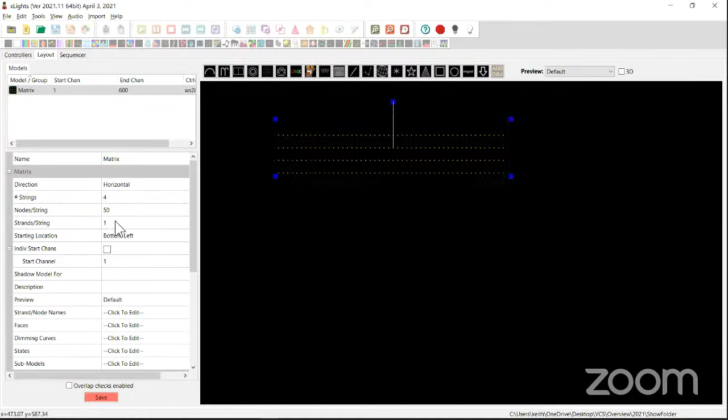Not impossible to build, just harder to build and harder to use in your show. xLights allows you to go up and down or horizontally across, but it kind of assumes the strings of lights you use are always the same length. So this is 16 strings of 50 - it's very easy to model this as 4 strings with 4 strands per string and 200 nodes.

If we look at the node layout here, you'll see this is 4 strings of pixels. So this is string 1 down here, zigzagging across horizontally, then string 2 starts and zigzags across horizontally, then string 3 starts and zigzags across horizontally.

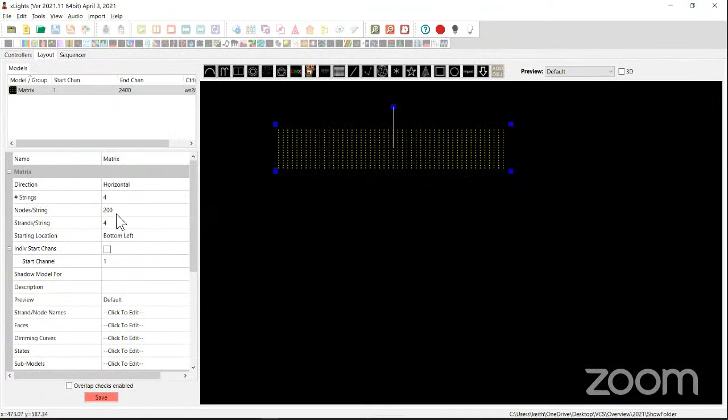But you'll notice that in xLights, there's no easy way to have different numbers of nodes per string. So if you had 4 strings of 200 and then 1 of 150, there's no easy way to model that using the matrix model in xLights. That doesn't mean you can't do it, but it means you won't be able to use the built-in matrix model - you're going to have to use a custom model to create that sort of model.

So generally speaking, I would recommend you try to model it in xLights first, because if you can build your model the way it's supported in xLights, you'll find there are advantages - slight performance advantages in using the inbuilt models, and some advantages in terms of buffers that are supported slightly differently across models, which changes how you can sequence them. Using the built-in models is generally a better thing to do.

Let's quickly run through the models themselves so you get a feeling for them. The arch model is obviously for creating what are typically arches created out of nodes or strips.

There are a set of options here, and we'll go through some of these shortly, but all the models have a set of options that support a set of variations. For instance, there are options that allow you to layer the arches, so you can create multiple layers. So 2 layers of 50, and you get a 2-layer arch and so forth.

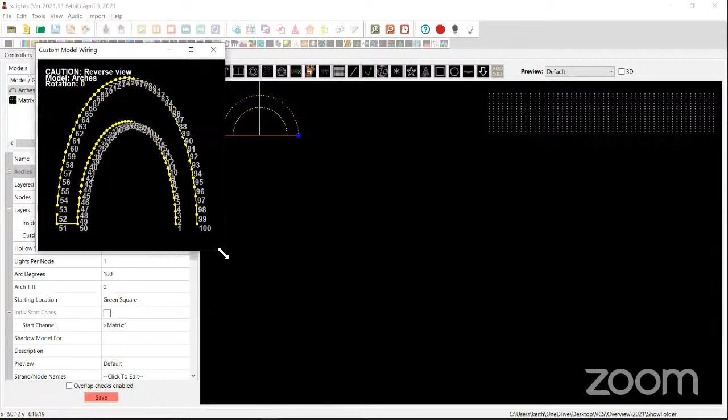There is also a wiring view here, which you might find easier to use, where you can see it. By default this is in the reverse view - learn how to use right-click, there's lots of right-click menus here. But we can look at this from the front, and you can see the wiring starting in the center, then going to the outside and coming back.

So you definitely want to take advantage of the wiring view. There's a wiring view here as well if you select this model, and it gets a little hard to see when there are thousands of nodes here. If we go to the front view, you can see it's starting at node 1 down here - very hard to see, need a bigger screen.

So there's your arches model, there's your candy canes model. Your candy cane model is also useful for modeling sticks. If you've got just sticks of pixels going up, you can click the checkbox here and you'll get sticks, and you can have as many as you want. There's 3 there, we could make it 10 - lots and lots of sticks.

The channel block model is not commonly used, but if you're coming from Light-O-Rama and used to sequencing just at the channel level and you'd like a similar way to represent things, xLights is more than capable of sequencing old AC type lights. So if you don't care to have the model look on screen like your wireframe, and just want access to the raw channels to sequence, throwing down a channel block model can be a great way to allocate, by default, 16 channels.

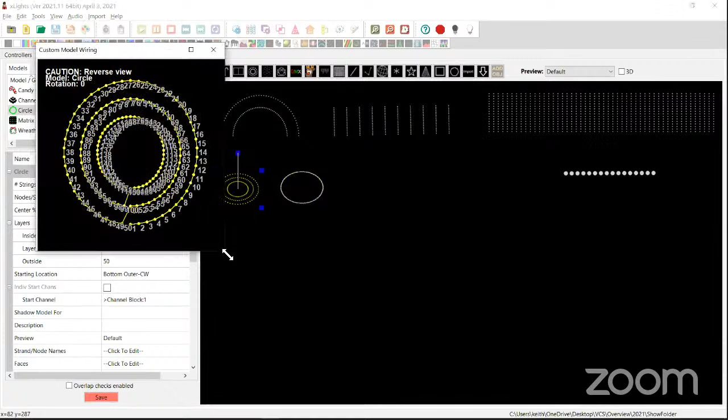Again, take a close look at the wiring view, because although in this case the options around wiring are a lot more flexible - you can start it in the middle or the outside, you can go clockwise or anti-clockwise. Both are possible using these various starting locations. The cube model.

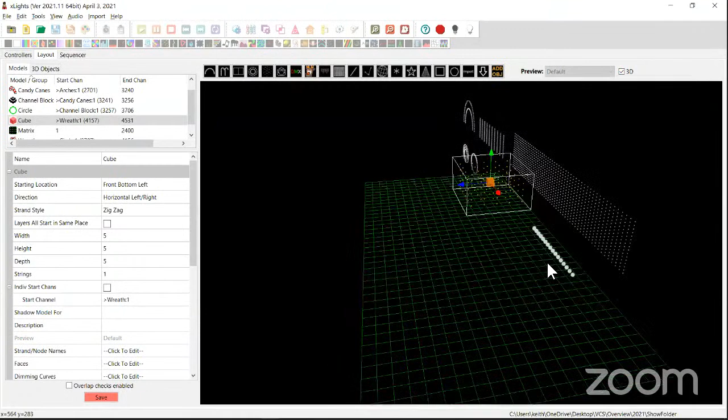Pixel cubes don't look great here in 2D. If we go into 3D mode, the cube model starts to actually look like a cube. But we'll stay in 2D mode.

The cube model can be really useful, not just for people building pixel cubes, which are relatively uncommon since they consume a lot of pixels quickly. It can also be useful if you've got a yard full of pixel stakes laid out in a regular grid. The cube model can represent that and give you access to additional render buffers that allow you to do really cool things, which is harder to do if you model those sticks as a candy cane model, or using the polyline model, which I'll show as well.

The custom model is the catch-all, and we'll come back to it when we go to the download. The DMX model is used for a whole bunch of different things.

There's a general one which allows you to model pretty much any DMX device. It doesn't give you a great representation on screen, other than a set of bars showing you the values the channels are getting.

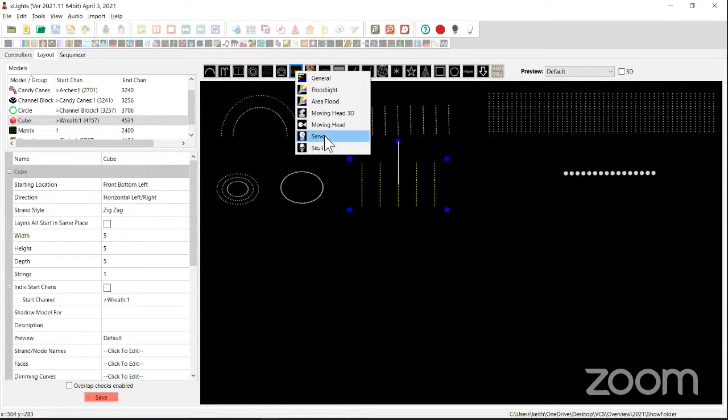But then there are more specific types like floodlights and moving heads, servos, and skulls. The servo model is extremely powerful for representing all sorts of moving devices you might create, and the skull model is designed for those 3D plastic skulls with multiple servos, etc.

The moving head and moving head 3D models, if you have those sorts of devices, take a lot of configuration. You've got to set all the channels, etc. But this allows you to control those sorts of things.

Definitely not as powerful as dedicated show layout software that's all about setting up a stage, etc. It's not at that level, but if you're building a Christmas show and you just have a couple of moving heads in it, this is more than adequate for sequencing those sorts of things.

And if you have something as simple as a fog machine, you can use the general model, which here just draws as a box. You can configure the number of channels and colors and things like that. This is great for fog machines, bubble machines, and that sort of stuff.

The image model isn't that exciting until you're actually associated with an image, but this can be really useful, particularly if you're coming from an AC show and you just like to represent each prop as a picture of the prop, or a picture of something representing the prop.

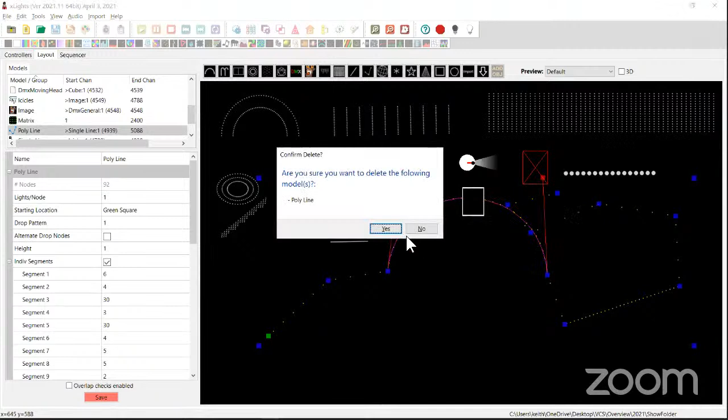The other thing you can do with the polyline is use it as icicles, by changing the drop pattern here. So if I create a 3-4 drop pattern, you get alternating nodes of 3 and 4. If I have 1 pixel between each, you can still put that in. So if you've got an icicle layout that looks like this, you can do it that way and define as many as you need to.

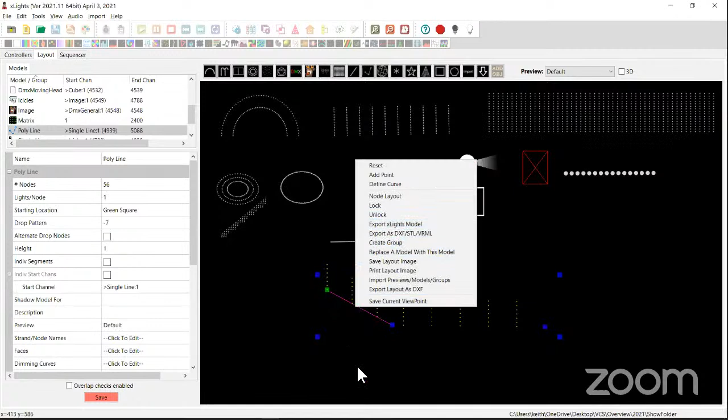Now if you want to do pixel stakes going around your garden, you can also do this by defining a -7, and it turns the drop downs into go up instead. Combined with your curve, you can actually do pixel stakes that follow a curved driveway or something like that quite easily with the polyline model. It's quite flexible from that perspective.

I'm going to skip over the globe model. Like the cube model, it's a 3D model if you're building a globe. The spinner model allows you to define a spinner. You can go and define the number of arms, etc. The spinner model, much like the icicle model, and even I'm pretty sure the polyline model, does offer you the ability to do alternate node numbering.

We'll go up and do it on the candy canes. So there is this checkbox here called alternate nodes. If you look at this wiring view - well, let's do the node layout instead, it's a little bit easier to read. You can see that by default for these particular stakes, it's starting node 1 at the bottom, and it goes up 1, 2, 3, 4, all the way up to 18. And then it comes down again and starts at the next one down here.

The problem with this is it's actually challenging to wire, because you're going to run the pixels up - that's easy - but then when you get to the top, you've somehow got to run an extension wire all the way back down to the bottom of the next stake and do the next stake up, which is not a particularly friendly way to have to model these things.

But if you use this alternate option, and things like the spinner, and I think the polyline as well, support this, and you go in and do the node layout, you'll find that the node layouts become quite jumbled. So now we've got node 1 here, just like before, but node 2 is now the third node up, and then it jumps again to node 3 and so on up, and then it comes back down again. So the last node on the stake is now the second bottom node, which makes it a lot easier to jump from here to the next stake without having to add large extensions. And so if you buy a set of pixels with an appropriate gap, etc., this just makes life a lot easier.

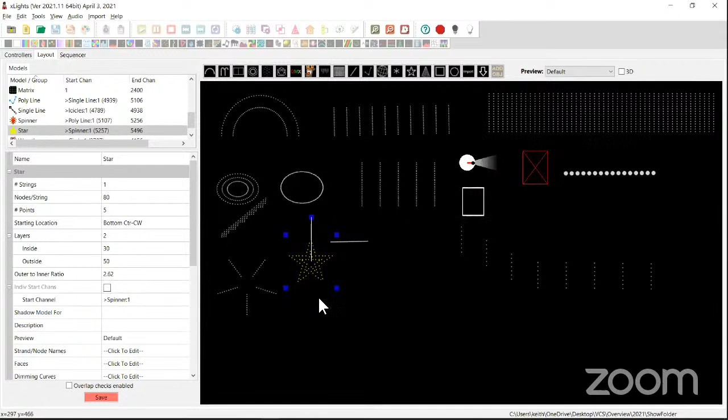Using the star model again gives you access to different buffers for sequencing on, which are going to make things more flexible when you get to sequencing. So again, I suggest you go that way if you can. The tree model - a very, very popular prop.

The tree model, by default, is this 360-degree tree, but there's a whole bunch of different types. You can have flat trees, or if you're building a ribbon tree, which is quite popular, that's a slightly different representation at the top, recognizing that all the strings are exactly the same length.

But even in the round, a lot of people don't really need a full 360-degree tree. Depending on the layout of your property, people may not be able to see the back of the tree, or maybe they can't see the full tree. Most of my trees are 270-degree trees.

So the back of the tree, which you can see in 3D here, is open, because no one can really see that when they see my display. They can see a little bit on the sides, so I wanted to fill that in, but there was no point putting a bunch of pixels at the back. These days, with everyone using bullet strips that you punch the pixels into, they largely make the back of the tree invisible anyway. So there's not a lot of point filling in the back, and you can cut it down by reducing the degrees.

A lot of people also build their trees up against a wall, so you might want a 180-degree tree instead, allowing the tree to basically sit back against a wall or something.

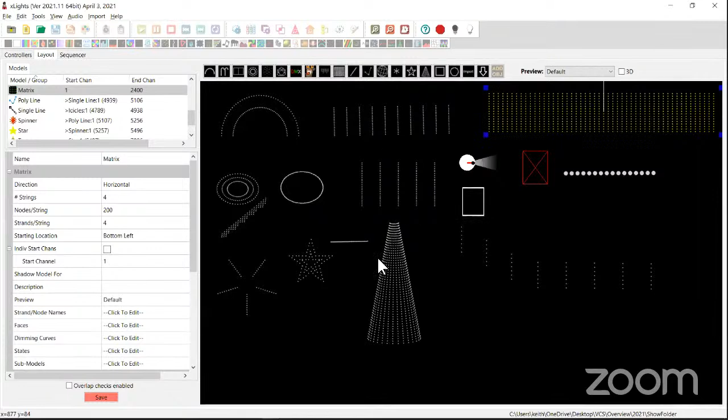If I take this model and export it as a custom model - hang on, we're clicking on the wrong model. If I export this as a custom model, we'll export it as a tree, and then import that model back in. There it is.

You can see it does not look the same, and it never will. It's always going to be that you lose some quality, and you're potentially going to lose some nodes.

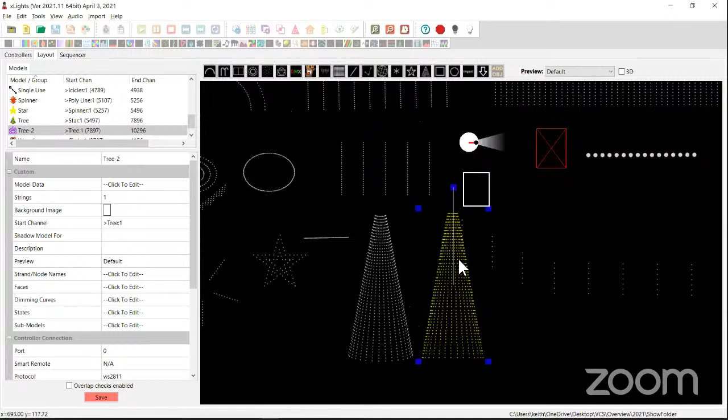If I run check sequence, that's a tool that scans your entire configuration. It's not just for when you're sequencing, it'll also check your layout. What it does is a deep scan of your layout to check if there are any problems.

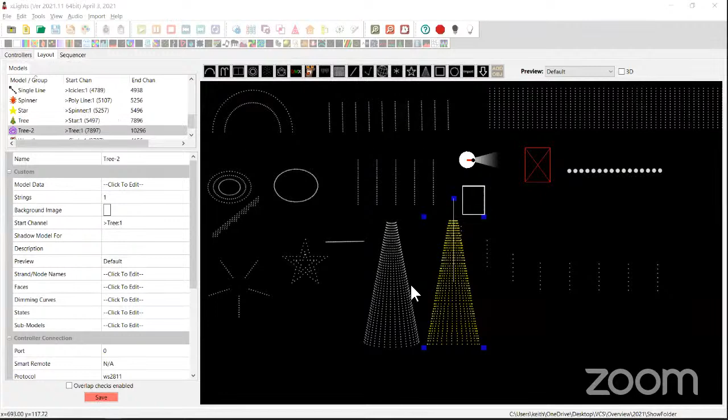So here's the results, right? You can see that the tree model we just imported has got a whole bunch of issues - a whole bunch of nodes are missing from the tree. That's just because when this tree gets exported, a lot of these nodes are really almost on top of each other, and the export process has lost some of those nodes.

So now I would need to go back in and manually correct and fix them, and that's before I then work out how exactly I'm going to do all the numbering to represent the wiring I've done. So this is the hard way. The easy way is to build the tree the way xLights expects it to be built, and use equal length strings.

The window frame model is great for outlining windows. It's also useful for outlining doors. You do have control here, and you can set 0 to the number of pixels, and now you've got a door outline. You may have a window that is hard up against the top of the house, and therefore you don't want the top. You can model that relatively easily using the window frame model.

You could also do this using a polyline or a string model. It's much the same. We did show you the import when we imported that tree. But if you're out there purchasing models from the suppliers, there are a couple of vendors, including the sponsor of this room, who sell models and provide a download.

Sorry, I'm in Australia. It takes a little bit longer to download. And so this has basically, there's multiple suppliers in here.

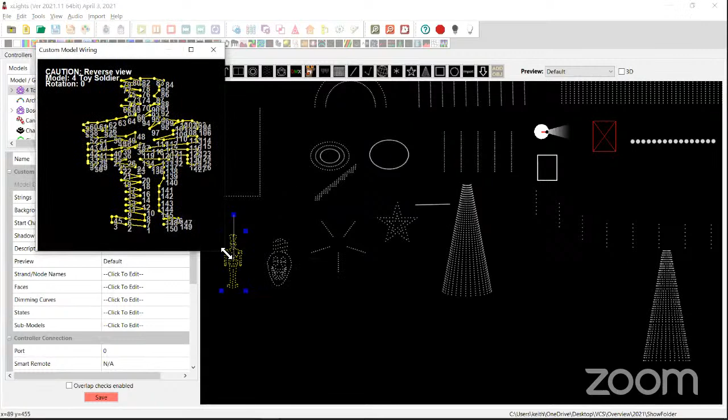You can see the wiring model of these things just by right-clicking and bringing up the wiring view. Now, this is deliberately the reverse. The reason we show these models from the reverse is the wiring view was originally built to help allow people to punch pixels into the props and know where they're going. And the reason we do the reverse is because most of these props are typically Coro props.

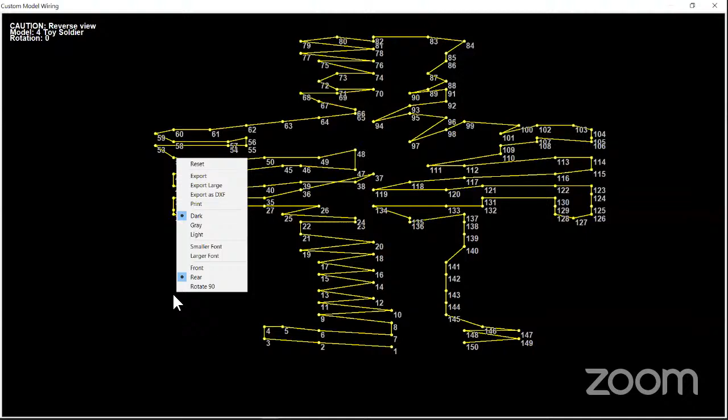People punch the pixels in from the back. And so having a representation of the model from the back is a lot easier when you're punching pixels in. If you were looking at it from the front, but you had the model from the back and you're punching pixels, you'd actually be punching them in reverse, and then you end up with issues at the end. So that's why we show it from the reverse.

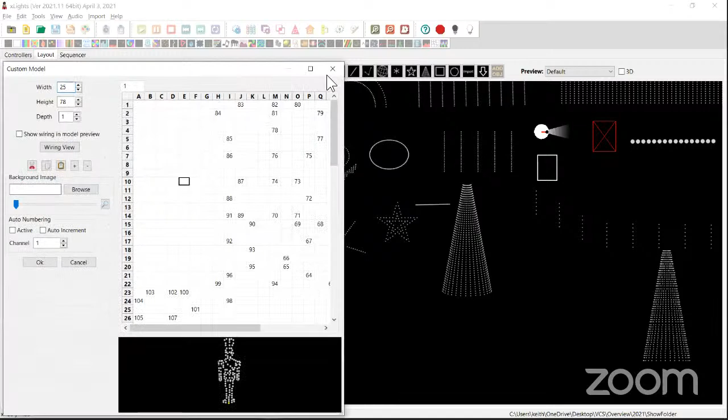Now, it's actually relatively easy - if you go into the model data, let's say you did push the pixels in reverse, if you want to flip the model around, it's actually relatively easy to do. If you right-click up on the grid here, there's a whole bunch of tools for manipulating these pixels and creating gaps and things like that. One of the things you can do is just horizontally flip the model. So if you've accidentally pushed the pixels in reverse, come in here, horizontally flip the model, and then the model will be fine - it'll be your correct representation.

You can also do weird and wonderful things in here. Let's imagine between 97 and 98 I've put an extra pixel in, so I need to create another 98, and then I want this to be 99 and 100, incrementing the models from there. You can right-click and say insert prior, which inserts one node prior to that node. That node's now 99, every other node has increased in number, and now I can insert a 98, and my model is correct again, with no gaps.

I can also delete a node. So I can delete 98 here, and now I've got a gap. I can right-click and click on compress, and it will close that gap. It realized there was no 98, so it took 99 and decremented it by 1, and decremented everything after that, and it ends on 150 again. So there are lots of little tools in here to try and make editing custom models a little bit easier to do.

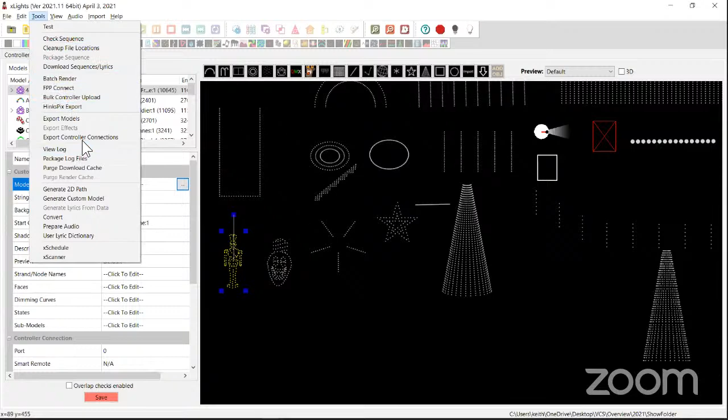There's also a custom model builder, a tool up here called Generate Custom Model. This process helps you build a custom model from either a photograph, or it will allow you to create a video which plays a pattern or runs a capture pattern onto your prop, and then you can load that video back into xLights. xLights will watch the video and basically place all of the pixels onto the model for you. I'm not going to run through that right now, but there are a number of people who have made videos on using that tool to create their model that way.

Now, the other thing you get when you download a model from a supplier like Boscoyo is some of the underlying definitions as well. So with something like a singing prop, you need to define the face definition to say which pixels should light up when various phonemes are being sung in the sequence. That's done in the face definition, accessed down here. Here you can see James has defined the pixels that are going to light up. When the A sound, which is typically the largest mouth shape, you can see these are the pixels that light up, versus the U, which is the smallest mouth shape. You can see which pixels are lighting up here as well.

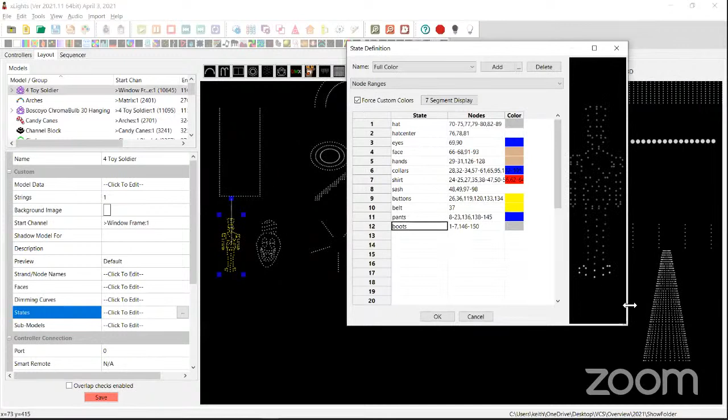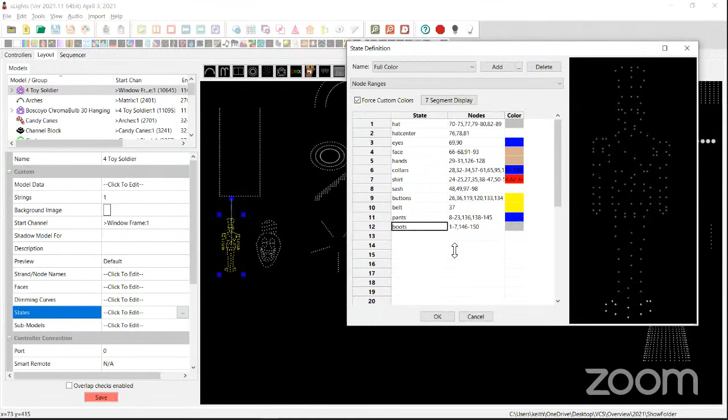And that's done with the states, and he's included the states in the model as well. So you can see on the right-hand side here, the boots, the pants, and so forth. He's even defined the color those various elements should be, so when we come to sequence this model, we don't have to separately work out which color to turn on which pixels. You can just use this state that's been defined on the model and turn all the lights on, and all the pixels will turn on the right color. So again, a very powerful reason why you want to be downloading models from suppliers if you can.

So that's the bulk of those pieces. Let me talk a little bit about some of the other common properties here. Let's talk about it from the tree's perspective, because this often confuses people when it comes to things like strings, nodes per string, and strands per string. I want people to understand what these things do.

By default, this is set as 16 strings, 50 nodes per string, and 1 strand per string. The number of strings should typically represent the number of connections from your prop to your controller. So this is assuming I've got a controller with 16 ports, connecting 1 string each, putting 50 pixels on each port. That's a fairly significant underutilization of a controller.

People do like to do this, typically not with 50, but often with 100, because it's relatively simple to manage from a power perspective. They'll use 16 or even 32 ports off a controller to run a tree that way. But lots of other people like to pack as many pixels onto a port as they can. These days, gone are the days where controllers max out at 170 or 340 pixels per port — now controllers are typically up around 1,000 and more pixels per port. So people often want to run 600 or even 1,000 pixels on each port, zigzagging up and down many times with only 1, 2, or maybe 4 connections to the controller instead of 16.

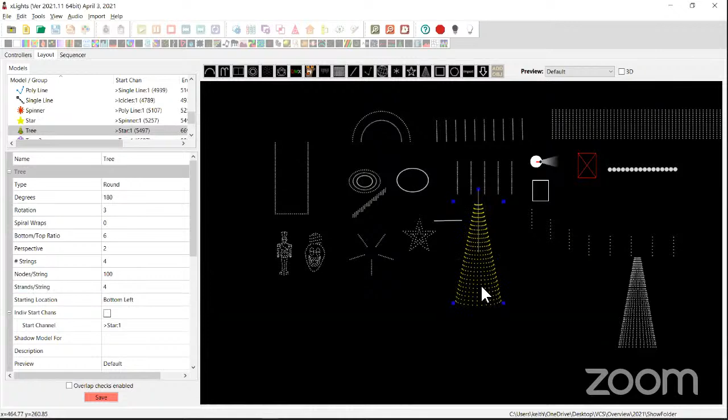The way you'd do that is by reducing the number of strings. So if I wanted to make this 4 strings of 800 or so, I could change the number of strings here to 4. Now it's only showing 4 lines, so what we need to tell it is that we need to zigzag up and down — let's say 4 times. Strands per string represents the number of times each string zigzags up and down the tree. If we change that to 4, the tree's back to looking like it did before.

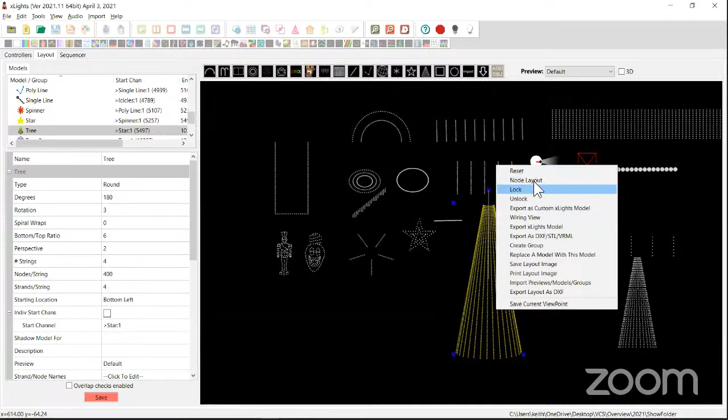Then we'll want to increase the number of nodes — say, 400 nodes. So that's now 4 strings of 400 pixels. That's how you'd represent it. If you look at the node layout again, it's easier to read — you can see it's 4 strings of 100 pixels, going all the way up to 100. It zigzags: the first pixel is here, but the 200th pixel is here, because it goes up 100, then down 100, up 100, then down 100, and then the new string starts.

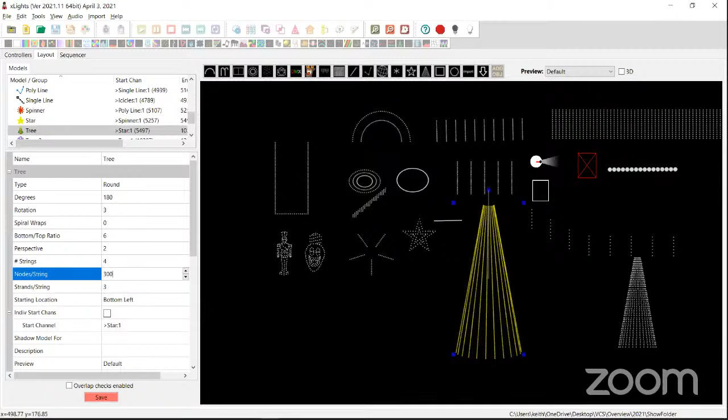Now if I made it an odd number of strands — say 3, with 300 nodes — let's do our node layout again. Node layout's your friend. You can see it ends at 100, but there's only 3 strands per string, so the 300th node is at the top of this 3rd strand. It always assumes you're then going to start the next one at the bottom, because that's typically how people wire things together.

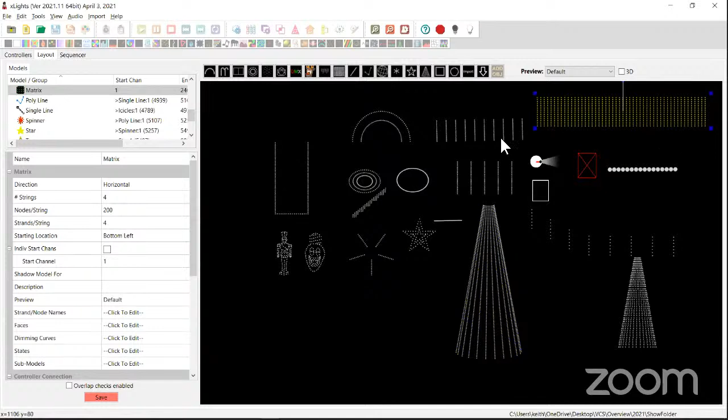The common one we see people do — a lot with chroma mesh and the like — is 48 by 24. What they'll do is run a string of 100 pixels: go across 48, back 48, then 4 more in, then stop, and run another string in from there. This sort of wiring pattern is starting to get into that weird and wonderful territory, and at that point you'd need to turn it into a custom model, because there's no easy way to represent that.

You could just model that as a single string of pixels. So you'd say that was... what's 24 by 48? I'm lazy, the computer's even lazier. There it is — 24 by 48 is 1152. So I could say that was 1 string of 1152 pixels and 24 strands per string.

And that would be a chroma mesh. The challenge is that it's representing it as one string, which isn't a problem from a modeling perspective — it's all fine, it will sequence fine and everything else. But one of the things people like to do these days is push the configuration of their props to their controllers. A major source of frustration for people in September, October, and November is getting their lights to look like they look in xLights. The biggest challenge is lining all your configurations up between xLights, your show player — often FPP — and your controllers themselves.

So that's all good. We will delete this model here. That's obviously a very sick model. We don't want to do that.

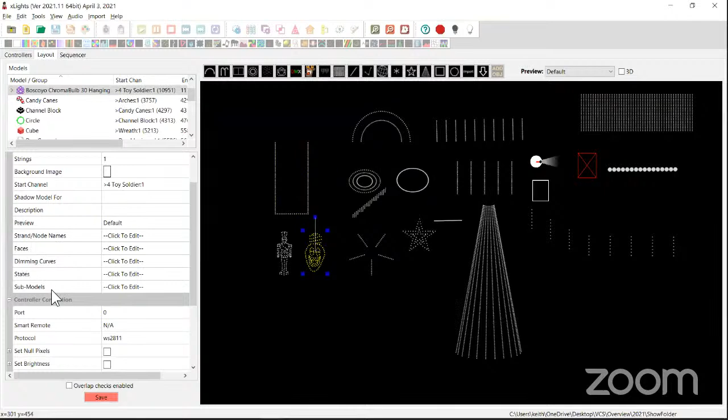Let's quickly talk about submodels because it did come up there. Submodels are a way in which you can take a model and break it up into elements. As you saw, the chroma bulb has submodels associated with it. We looked at the faces, but there's also this submodel section down here. You can have many, many submodels per model. These allow you to define subsets of the pixels on that model as belonging to a particular thing. So here they've separated the left eye and the right eye, and this will allow us to sequence those things independently if we so wish to.

This mouth 5 down here is referring to a node 153, which clearly does not exist. That doesn't get close. 142 looks like the highest. That's why we were getting that warning.

Submodels: the socket and the bulb outline, etc., is a classic example of where a submodel would be very useful. So if you wanted to color the socket in gold or silver and then change the bulb to different colors representing a bulb that's changing colors, having access to those submodels so you can sequence those things independently is an incredibly powerful thing to do in the sequencer.

The other reason submodels are interesting, and there are videos you can go watch on buffer layouts etc., is submodels let you effectively create interesting or useful subbuffers.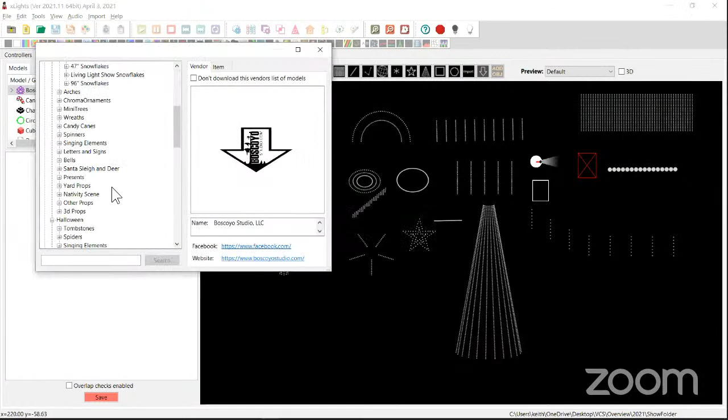So if I go here... chroma ornaments, one of these will do, I think. He's got ones here that have matrices on them. Matrix, there we go. The image doesn't have a matrix, but I'm going to trust the description over the image. You can see here how this chroma thing has got a kind of a matrix, but it's not laid out like a nice regular matrix here. It's a bizarre twisted shape that represents, obviously, a 3D ornament.

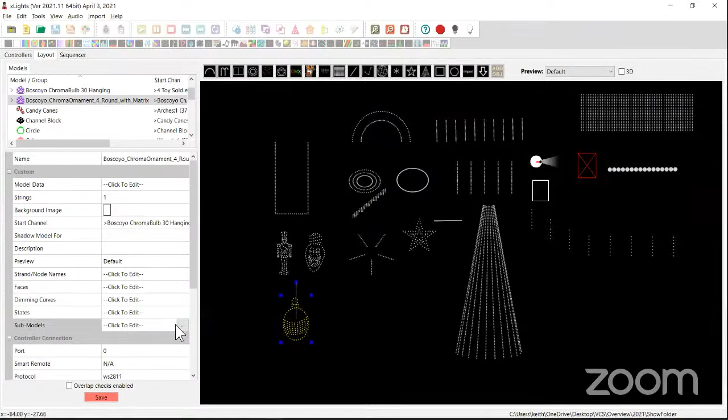That's almost certainly got a matrix submodel associated with it. It's actually got a very poor matrix associated with it. This submodel here would let you light that up, but let's go and add a submodel here. Right, let's add a better matrix.

Now, if we go back to our original matrix, it's 25 to 94. So I'm going to assume... where are we? That's 85. That's 79. That's 30. 94. What has he done? 30. Oh, he's counting this one. That's what he's doing. So he's gone down 19 to 24.

So what we're going to do is a vertical buffer layout. We're going to start over here with 107 and go to 112, and then we add a row. If you add a matrix like this, so this one here is 85, 84, so it's 85 to 79, 85 to 79, and so forth.

I'm not going to spend the time that it will take to do this, but if you actually define the matrix in this way—and I've done it vertically because the pixels were laid out that way—defining the matrix this way will actually let you easily sequence this and put text on it and things like that, which this matrix model won't let you easily do. So you don't want to be defining your models like this. You want to be more careful in terms of how you lay your buffers out here to make these things more practical and useful.

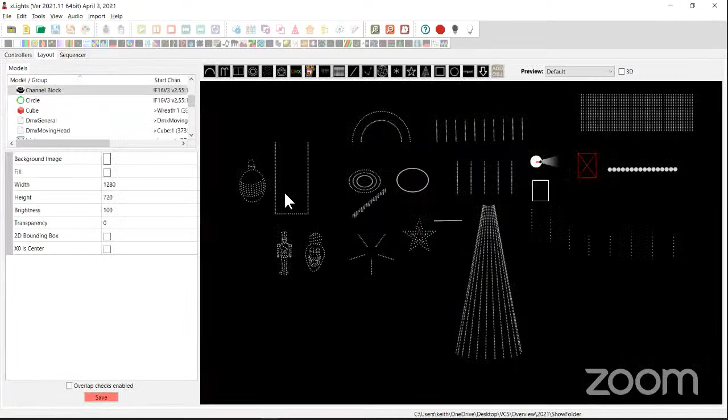Now, I did say that we could do weird and wonderful things with our custom models. One of the things your custom model supports is the ability to define multiple strings. So let's say, rather than doing this all on a single string, because this is 120 nodes, let's imagine I decide I'm going to use 2 strings.

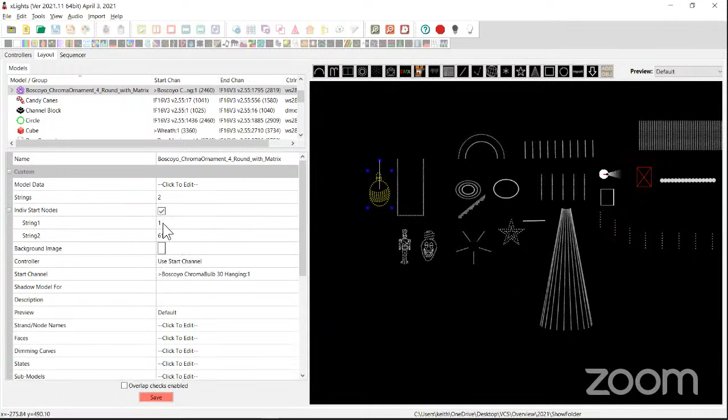By default, it assumes the first string starts on pixel 1, and then the 61st pixel will be the second string. But a more common way to wire it would be to start the second string at 101, so I have a full string of 100, and then a final string of 20 pixels on that prop.

Then if I come back to my visualizer and find my chroma ornament, you can see here how it's 2 strings. And if I drop it onto here, it's put 100 pixels onto my first port and 20 pixels onto my second port. Again, making it easy.

So this is why you may want to use custom models for some models, because it gives you a great deal of flexibility in terms of how you split your strings up, something that's not easy to do with the inbuilt models. They tend to have a fixed construct, as we've been talking about.

Now, there are other ways to work around these sorts of issues. There's a concept called shadow models, which there are videos available on that will walk you through that stuff. If you really want to get into that, it can help you avoid having to go to a custom model. You could create shadow models for your bizarrely wired tree, for instance. It's an alternate way to do things.

Before I go into the sequencer, I don't think there's anything else. There's a bunch of stuff down here that you may want to play with.

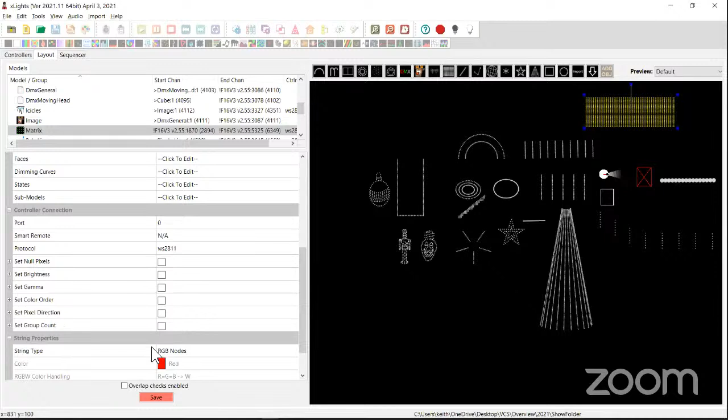Some people, sometimes your nodes aren't RGB nodes. By default, xLights assumes everything's an RGB node, but let's imagine I'm using strip light around this window and they're BRG strips. Well, then you can come down here and set it to BRG strips, and xLights will reorder the colors accordingly.

Beware that you only want to do this in one place. So I've done it here in xLights. Don't come up here and change the color order to BRG as well, because that will effectively reverse it. This applies it on the controller, this down here applies it in xLights. You want to do it in one place, not in 2 places. It doesn't matter which one you choose.

One gets done in xLights and rendered into your FSEQ file, which is then loaded onto your show player and played. This one here gets done by your controller as it reads the data or receives the data over the network. It will shuffle the data order of the pixels before it sends it out to the wire.

One of the reasons why I would generally do color order in xLights, because it doesn't generally change. Once I've built my prop, it's built with BRG pixels. It's not changing. If I go and rebuild my prop, I'm going to do it once per year. It's no big deal to come into xLights and change it.

Brightness, however, is something that I would typically set on the controller. The reason for that is brightness is one of those things you'll want to play with, maybe just during your setup time, when you're trying to sort of perfect everything and get rid of the glitching that occurs. Go and watch my other video on why glitching occurs on pixels.

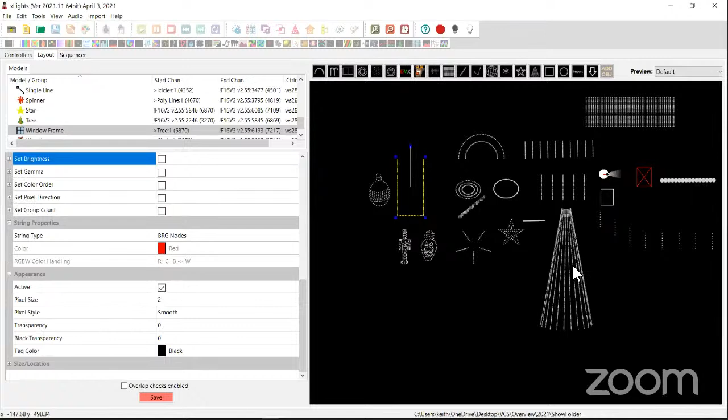Appearance settings, you can hide a model. So if you've got a model that you're planning to build, but you haven't really got around to yet, you just want to make it disappear, you can click this active thing here and it will disappear off the layout. It stays in your list up here, so it's still here. You can still sequence on it and everything else, but it won't appear in your layout at all. So you can do that.

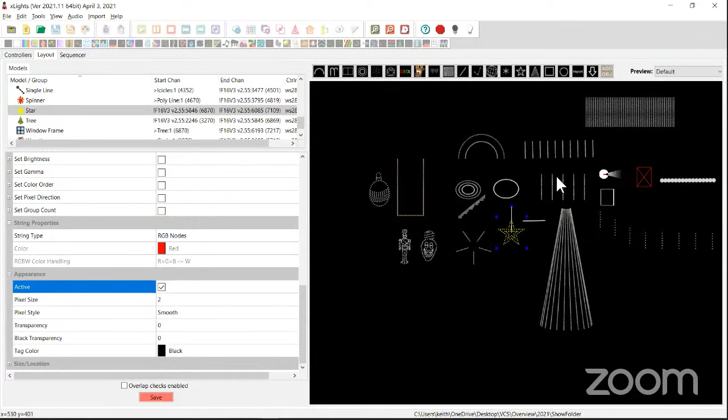The other thing people like to play with sometimes is your pixel size. Sometimes people will decide that this default of 2 is not big enough. They'll want big ass pixels. That's just how it looks on the display. It's obviously got nothing to do with how it displays on the lights, but sometimes you may want to do that. Be very wary of playing with pixel style.

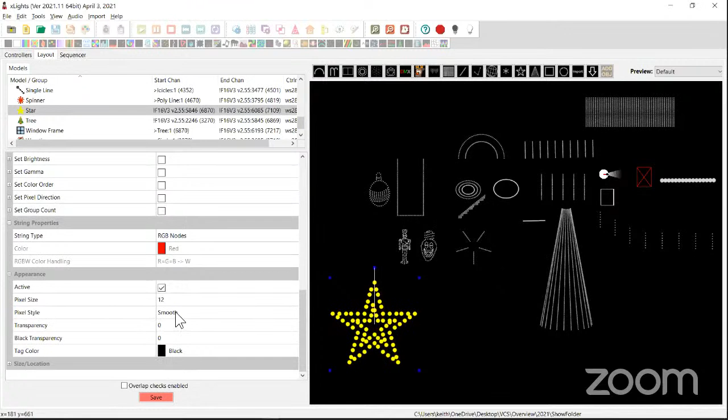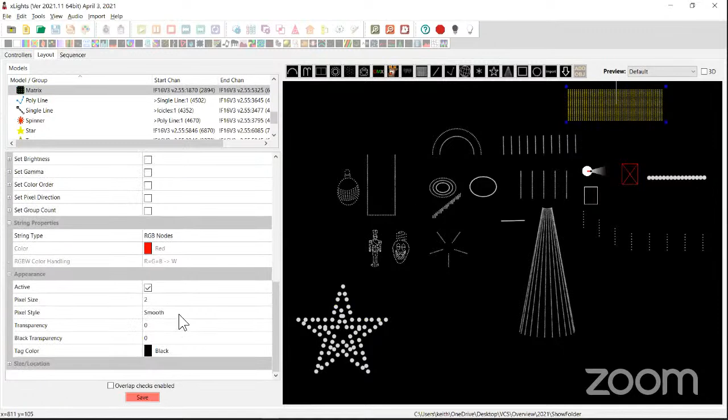Smooth's okay. I think square's okay. You may want to use square if you've got a matrix and you're using it in 3D. Matrices in 3D don't always look spectacular. They can often look like the pixels disappear, and changing them to the square setting can sometimes make your matrices look a lot better in 3D mode. Be careful about using some of the other ones. They can have a significant impact on performance, so you may not want to do that.

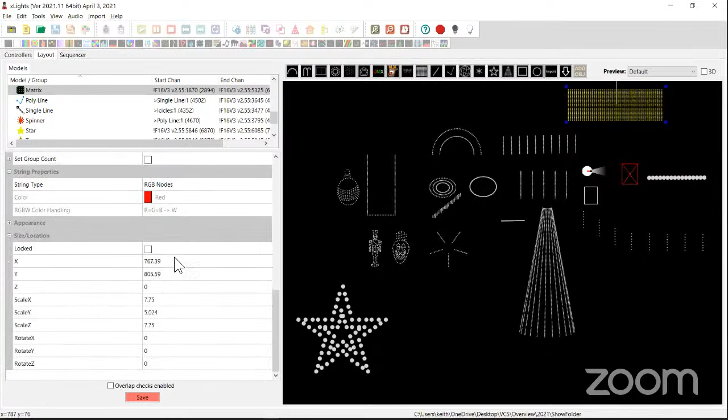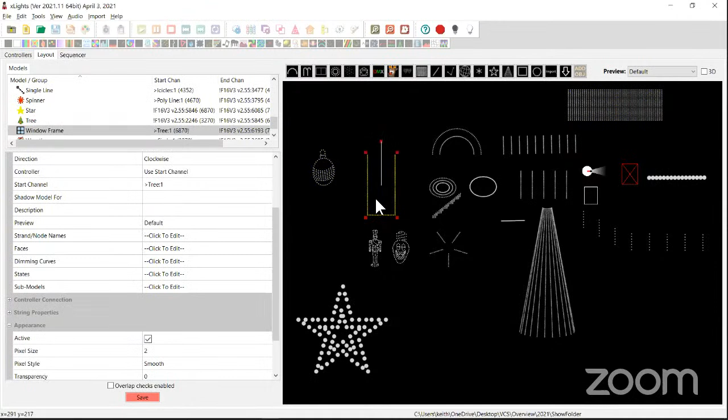Size and location - the only one that's really useful here is the locked property. Once you've done your layout, coming over here and right-clicking and locking your models, you'll notice that the borders around the models are now red rather than blue. The blue lets me click and drag things. I cannot click and drag locked models. I can still change all the other properties of the models, but I can't move them around.

That's really useful because once you start to get models on top of models, and we've all got something inside our windows, right? Selecting it can get a little bit more difficult, and then you'll click on it, think you've got it selected, and then click again to drag it and the selection will change and you'll suddenly find yourself moving the wrong model and things like that. So locking your models in place once you're happy with them can remove a lot of the frustration.

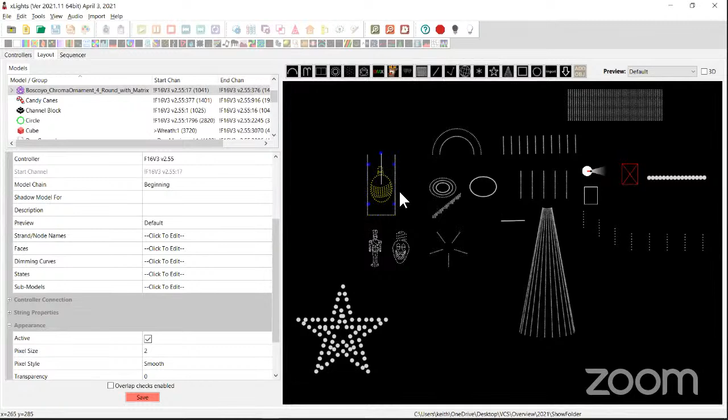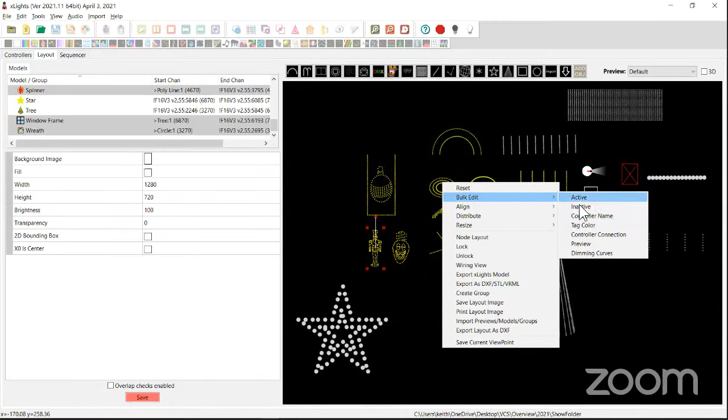There's also a bunch of other things on the right-click menu here for doing things like aligning models or spreading them out and resizing them and that sort of stuff. There's also some bulk edit stuff in here that lets you change the same property across multiple models at once that you may want to explore.

The one thing I didn't cover is you can actually also put an image background behind this. I'm obviously doing everything here on a blank screen. When you click on the background itself, you get access to the actual properties of the background. One of the things you've got access to here is an image. So if you go to your show folder, go to mine, go to my house. I can put an image of my house there and hang my lights.

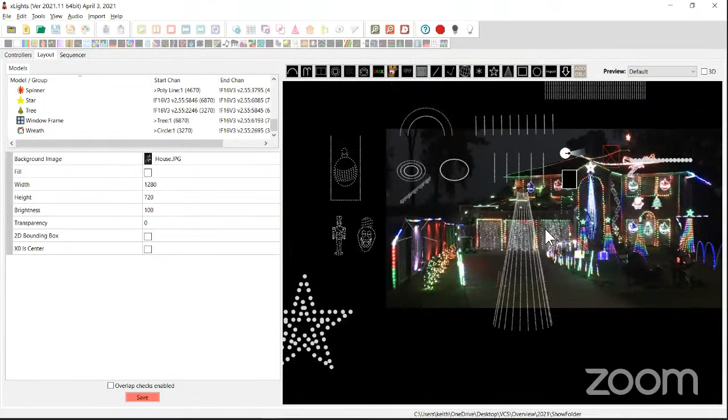Now, I always use an image of my house with lights on it. The reason I do that is because when I'm laying my tree out here, of course, everything is now locked.

I'll unlock them. I want to drag my models over and size them appropriately to scale, etc. Having a view of my house with the lights on it allows me to put everything in exactly the right place, which makes it so much easier when laying your lights out correctly. So I strongly suggest you do that if you can find an image of your house.

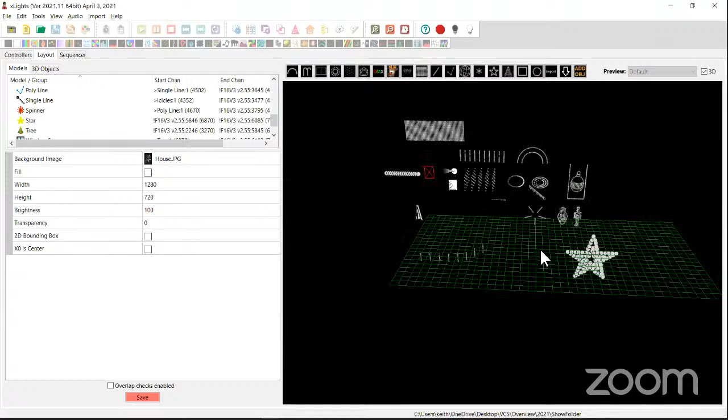Now, when you're in 2D, obviously wherever this photo has been taken from will be the perfect place to watch your show from. So you want to go out and mark that spot because that's going to be the best place. In 3D, it doesn't matter so much. I'd encourage you to go watch Gil's presentation from earlier if you want to understand how to do things in 3D. I'm not going to cover that here, but there's a whole bunch of things.

In 3D, you have the ability to set multiple viewpoints, which you can then use later on when you're sequencing and everything else to generate effects that appear to be orientated from different sizes and sides and things like that.

Okay, so any questions on layout or controllers before we jump into sequencer? Because I do want to spend some time in the sequencer. I never spend any time there.

Has anything been happening in chat? I can't see chat for some reason. God, I hate it. Everyone's quiet. Anyone there? All right.

Had a question about a block for LOR. Can I use a block for a controller, then have it start at channel 80 to 96?

Yeah, absolutely, you can. So let's go back to our visualizer on this controller here, because we put our channel block down here. So at the moment, this is set up to be on channel 1. But you can right-click in here and set it - what did you say, 80?

Let's say it was - yeah, that was what was suggested. So you can come in here and set it on channel 80, and now it's defined as channel 80, which would be unit ID, whatever it is - I can never remember. But yeah, you can customize those, and those other ones don't even need to exist.